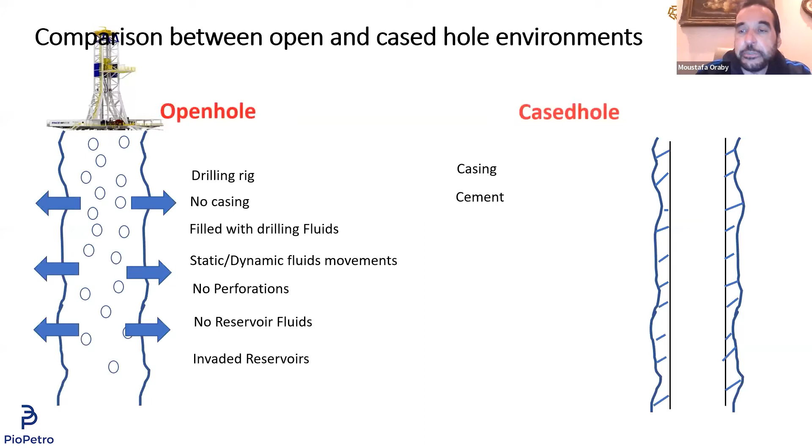That's the situation we are used to seeing in open hole, which is not the case in cased hole. If you compare this to the cased hole, you drilled the section, then you descended the casing. So this is the casing there, as you can see, it's right there. And the casing, you cemented it after you set it into the wellbore, so you have the cement between the casing and the reservoir or the formation.

Then you either keep a workover rig or you put the production equipment, so you have the wellhead in there. Then you start doing the perforation, so you have the perforation there. You perforated the reservoir, then you see the fluids actually coming into the wellbore from your reservoir. So the reservoir now started to produce.

When this happens, we have two situations. Either the fluids inside your wellbore are static, shut in—we call it shut in—meaning you're not really producing the formation or reservoir yet, so the fluids are static, there's no motion in there. Or the fluids are actually flowing, which we call dynamic. So in cased hole, we have two situations of our reservoir fluids.

Either the flows are static when we shut down the well, we're not really producing, or everybody knows from production logging that you control flowing or shut-in from the wellhead by controlling the pressure in front of the perforations. So you can control if the fluid is flowing or static. This is very important in cased hole, because we can log while the fluid is flowing, and we can log while the wellbore is shut in, meaning the fluid is static. The fluid we deal with in cased hole is not drilling fluid or mud, there is no mud, so what you're actually dealing with is the actual reservoir fluid.

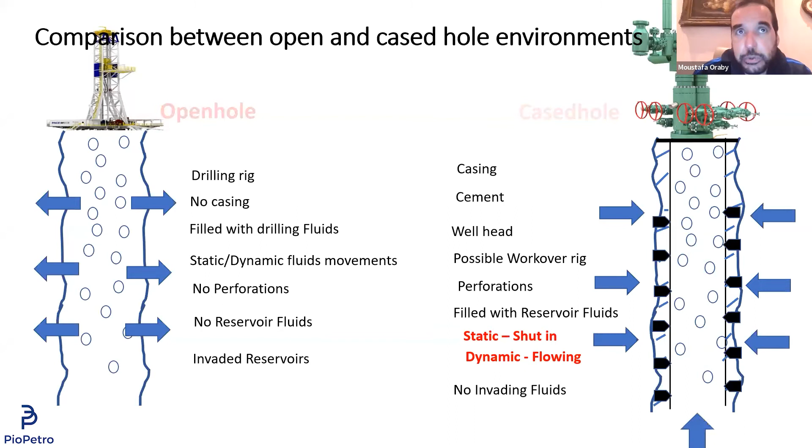So the cased hole function is much, much more than the open hole function. The open hole, we do it once. Cased hole, we do for the entire life of the well - we have to monitor this. That's why sometimes we call it reservoir monitoring. We have to monitor the reservoir - what's really happening inside our reservoir, what are the changes in the reservoir fluid, what is the change in the reservoir, in the wellbore itself. So there are so many aspects for cased hole logging.

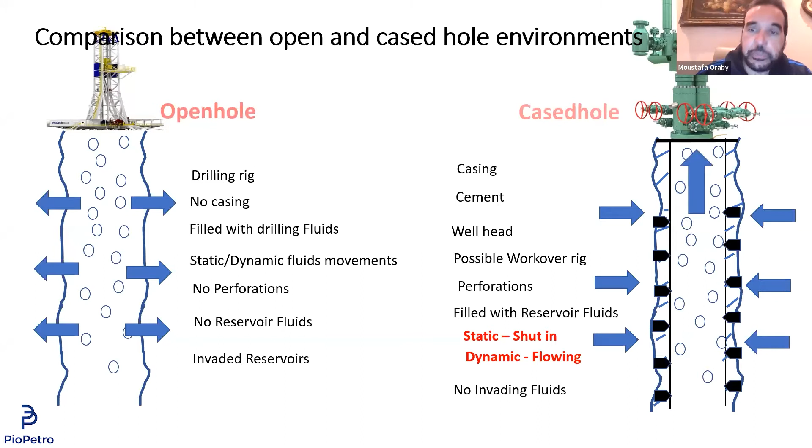Once we define this, then we have to look at what is cased hole. I can actually divide this into three components. So just keep in mind, in cased hole I divide everything I need to look for into three main components. The first component is inside the wellbore - what's happening inside my wellbore, what is the condition inside my wellbore. My wellbore now is defined by the casing.

What's inside my casing? What's really coming inside my wellbore, because I don't see the reservoir in the wellbore anymore - my reservoir is actually covered by the casing. So what's really happening inside my wellbore?

This is one aspect. The second one is what's happening between the wellbore and the formation. What's happening in the casing? What's happening in the cementing? Is the casing in good condition? Is the cementing in good condition? So that's something else. So now we talk about the wellbore itself - the fluids contribution, the fluids status, what's really happening there. Then what's happening in the barrier between my wellbore and my formation, which is the casing and the cementing.

Also, what's happening inside my reservoir? What's happening to the fluids? How much hydrocarbon do I have left? Where is the water coming from? If there is water, where is the oil coming from? If there is oil, where is the gas coming from? If there is gas. So actually you divide it into three major components.

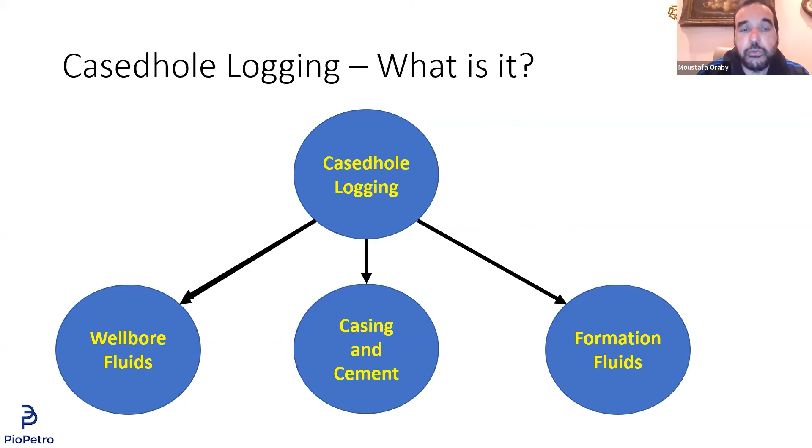Inside the wellbore component, between the wellbore and the formation, and then outside the wellbore, which is the reservoir itself. So inside the wellbore, we monitor the wellbore fluids. Between the wellbore and the formation, we monitor the casing and the cement. Outside the wellbore, we monitor the formation fluids. So we have three things to look for: wellbore fluids, casing and cementing, and the formation fluids. That's what we really have.

Again, when we look at this, we call few things fluids. What do you really need to know about fluids? I need to know the type of the fluids, the velocities, and the rate of the fluids, which are very important to us. What fluids are we producing? For example, if I'm in an oil reservoir, I do not really need to see many or multiple gases or a high gas rate in my wellbore. I don't want to see any water coming out. So I need to look at what's happening in there, and if I can control the flow from my reservoir into my wellbore - the velocity of the fluids coming in, and the flow rate of each one of these fluids - this is very critical in evaluating the performance of my well.

So the cased hole is really well performance. And if you look at the whole number of wells, it is field performance.

The second one is the condition of the cement and the casing. I need to know, is the casing in good shape? Anything happened to my casing? Cement - what's really happening in the cement? Because sometimes if you're not really understanding the cement, we'll talk about something like a channel. A channel is really very dangerous in the life of the reservoir. We don't like to see any cement channeling between the casing and the formation.

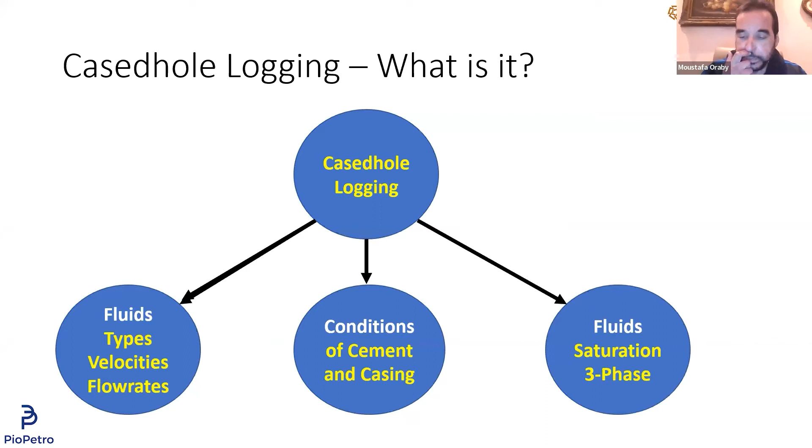So what do we call them in this case? The first one we call PLT, production logging. Whatever we actually look at inside my wellbore is part of my production. So one part of cased hole logging is production logging. Production logging looks at what's inside my wellbore - the velocity, the type of the fluids, the flow rate - all of these things we call production logging. So the first part of cased hole logging is production logging.

The second part of cased hole logging is the casing and cement inspection. You have to continuously inspect the casing condition. You have to continuously inspect the cement condition. That's the integrity of your reservoir. So the second part we call casing inspection and cement evaluation. This is also part of cased hole logging.

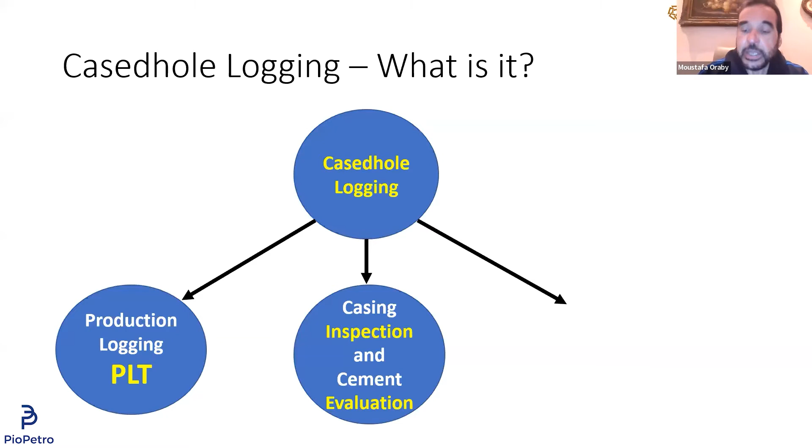The third one is saturation behind casing. What is the water saturation currently now? What is the oil saturation currently now? What is the gas saturation now? So we need to know all of this.

If you look at any cased hole logging, sometimes people - and I can see this even in the industry - mix things together. They think cased hole logging is only the monitoring of the reservoir. That's not true. Cased hole logging has three components: the first is production logging, the second is casing and cement evaluation, and the third is saturation behind casing.

So keep in mind that you have three different zones, and every zone requires a lot of attention, because this will control your productivity, your well performance, the integrity of your well and how it's behaving, or if there's anything dangerous you need to take care of - anything that may result in a blowout or whatever. You need to make sure you're really in good handle of the reservoir condition and the well condition that you have. So the three components are production logging, casing inspection and cement evaluation, and saturation behind pipes.

In every one of these webinars on cased hole logging, we will touch on some of these.

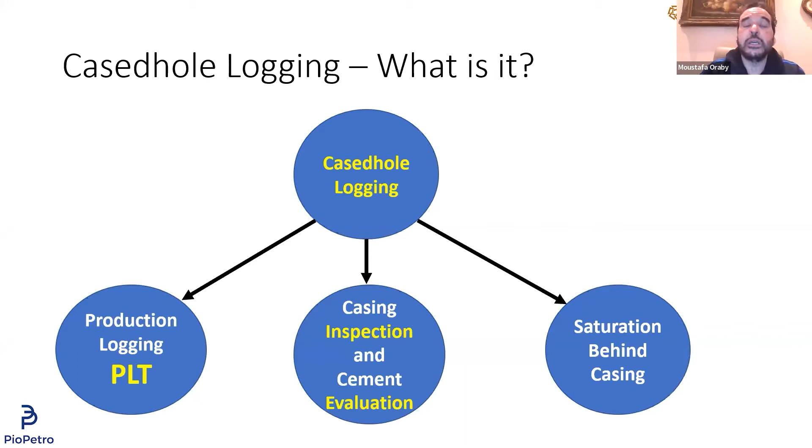Once you understand the idea and how we do the measurement, it becomes much easier to say, if I see this phenomenon, it means that. Because when you understand the tool and what it measures, it's easy to understand what the log is showing. And if something doesn't make sense, understanding the tool helps you determine whether it's real or what it means, because there are so many things you need to be careful about when doing cased hole logging.

So in this case, let's go to the first one. When I look inside my wellbore, I can see so many things happening—that's when I go for production logging. I can see water coming in, I can see oil coming in, gas coming in. If you look at this example, it's an oil reservoir.

Once you start producing your reservoir, what happens to the pressure? It will go down, it will decrease. The more I'm producing, the pressure decreases—so the driving forces decrease. Now, if you're not perforating in the upper zone, let's assume you have a gas cap on top that you're not producing. The zone you didn't perforate still has its own pressure since you're not producing it, so the gas will expand and go through the perforations you have, generating what we call gas coning.

Gas coning can occur if you have a certain type of gas cap. Also, gas can come from production itself because if your pressure goes below the bubble point, you start seeing gases. Similarly, if you have an aquifer—a water zone at the bottom—once you start producing, you have high pressure in that zone which will try to get into your perforations, and water will come in. So you may end up producing gases from the top due to the gas cap, and water from the bottom due to the aquifer, since both the gas cap and the aquifer at a certain time will have pressure higher than your reservoir pressure, and they will try to get through the perforations you have.

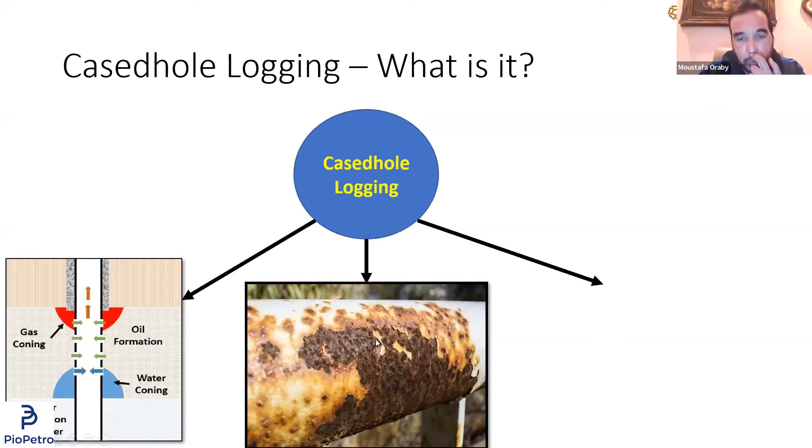It can be even worse. It can be corrosion in there. Look at this, what's happening to your casing. I need to find this out. That can put my well in a very bad condition and can result in so many bad things that, God forbid, can be really a disaster in the field. So we need to know that. How can I identify this? How can I measure that? What are the tools that we use to do this? So this is really something that we need to monitor.

Also, if you look here, for example, there is a pitting or a pit happened inside my casing. So what happened if I have a pit inside my casing and I don't have a good cement? In this case, the fluid from the well bore will get into the zone between my casing and the formation, and extra pressure will be building up. If I have a channel inside my cement, the fluid will get in and fill these channels. This is a big disaster that can result in really big disasters in this well, and probably something we don't want to happen. So monitoring this frequently, in a certain period of time, we have to do this to make sure we are really controlling our wells well, and hence our field as well.

At the same time, here again is our reservoir. Now we will talk about the reservoir fluid itself. How much gas do I have? How much water do I have? How much percent-wise, saturation-wise? How much saturation do I have from oil? So we need to find the saturation currently, and probably periodically, every 6 months or every year, depends on your company. Some companies actually have a periodic check every 6 months. We need to know what's really happening in our reservoirs.

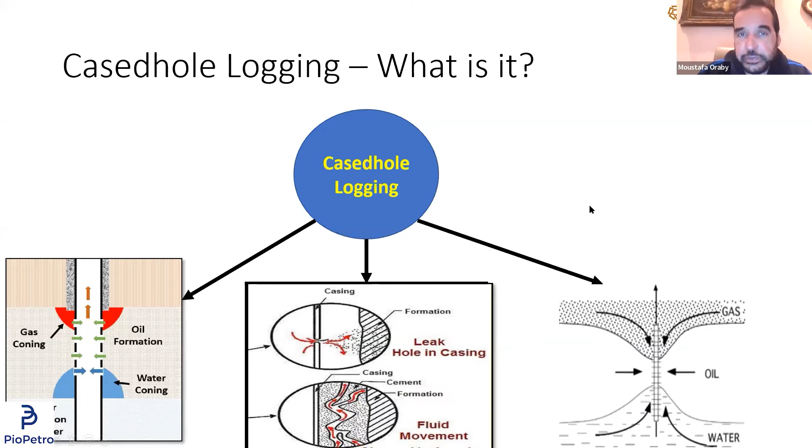So that's the cased hole, and that's what we are looking for, and what we really need to monitor every time and every now and then in the life of our field. So let's start with that. From that definition of what is the cased hole, let's just start to see how can we do this, and what are the tools that we use in this case.

So let's just start with the first one, inside the well bore. We'll start today inside the well bore and see how can we measure, how can we identify, how can we predict what's really happening inside my well bore, which we previously called PLT, or production logging tools. So production logging will be the first one to start with, to really monitor what's happening inside your well bore. So if anybody is talking about production logging, you know that they are monitoring what's inside the well bore.

So an important question to answer, we always say, is there any gases coming from the formation? That's a big question, a very important one. In many situations, we don't want to see these gases coming out. Sometimes the gas rate is very high and it causes issues, we just don't know what to do with these gases. Some of us go and flare these gases, and nobody likes to flare things. So it's very important to know, is there any gases coming out of the formation?

Also, is there any water coming from the formation? These are two very important questions. And it's not just if there is any water or gas coming in, but from where it's coming in. What are the perforations that's actually giving us these gases, or providing us with this water? Probably if I know the location, if there is a way to fix this, I need to go and fix it. So before you go and fix it, I need to know where it's coming from. First of all, is there any of them? Second, where it's coming from.

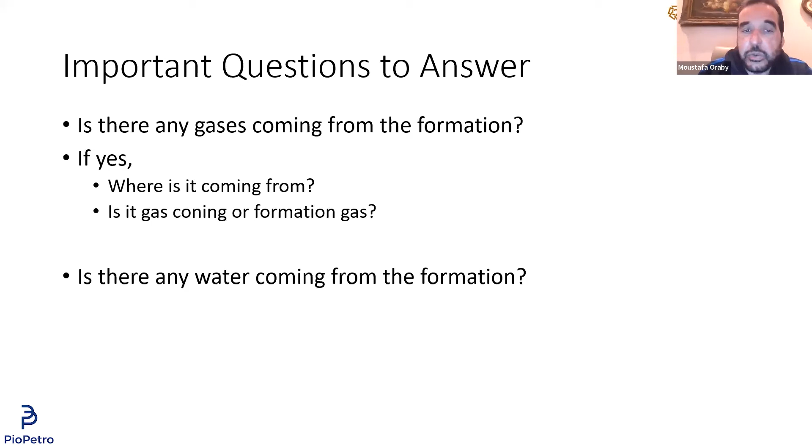So the answer to the question, if yes, then where is it coming from? And is it gas coning, or is it gas from the reservoir? I need to understand that very well. Similarly, if I have water and the answer is yes, then where is it coming from? Is it coming from an aquifer, or from low pressure, or something I need to deal with as far as the reservoir is concerned? So answering the two questions: yes, I can see gases coming from my production, I can see gases, I can see water is coming with my fluids.

Okay, but that's not the answer. Yes, I can see that from the wellhead, I can see from the fluid that's coming at me. But the most important question is: from where? Where is it coming from? Which perforation is providing these types of fluids?

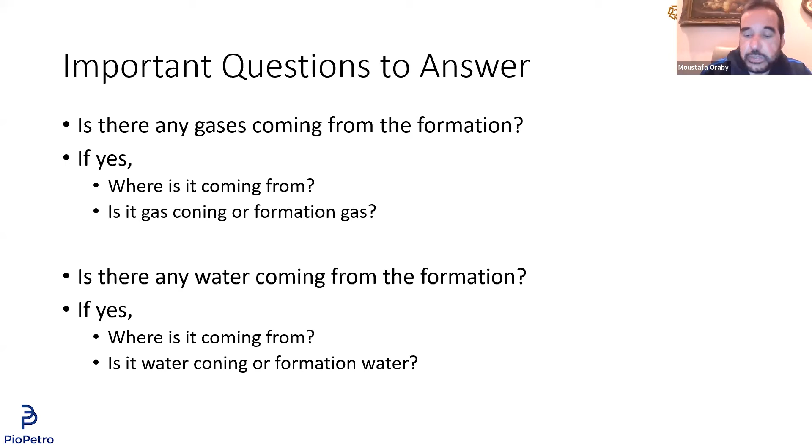We'll look at some examples here to show you that some of the perforations will produce water, some of the perforations will produce gas, other perforations will produce oil. So we'll see some of these examples to show you how we can find this out.

Okay, again, that's the same. I always use this actually to explain the gas cap and the water coning. And these are very bad things. When you see coning, that's not really something that we like to see, and we need to control this very well.

Okay, so let's start with the gas first. Where the gas is coming from and what are the reasons for the gas coming from. So what happens when the gas flows in the wellbore? We need to answer that question very clearly from the physical understanding of the gas itself. And also, once the gas comes in, how can I detect it? How can I know the gas is flowing? Because I need to know where it's coming from and also how to handle this.

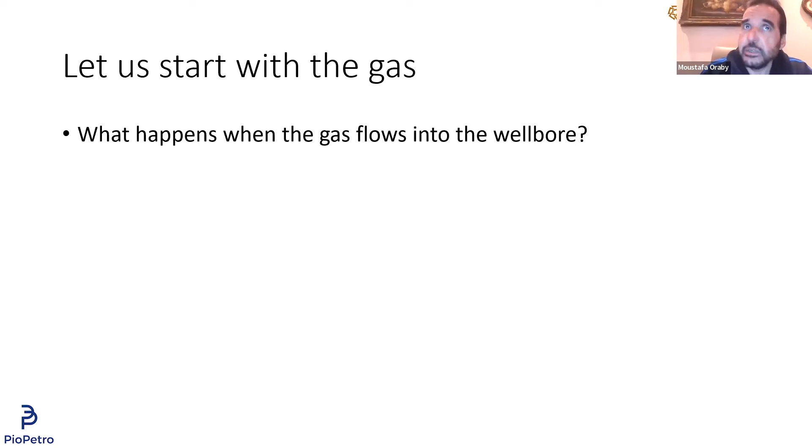So what happens when the gas flows into the wellbore? Very interesting question. Here is my well, and let's assume here are my perforations, and let's assume I have a gas cap there. And I started producing my reservoir. So this is the gas cap on the top, above my perforation. I actually did not perforate in the gas cap; I perforated in my oil zone.

Gas cap is above, here is my oil zone. I perforated inside my oil zone. So this is my reservoir, which I'm producing from. But above me, there is a gas cap.

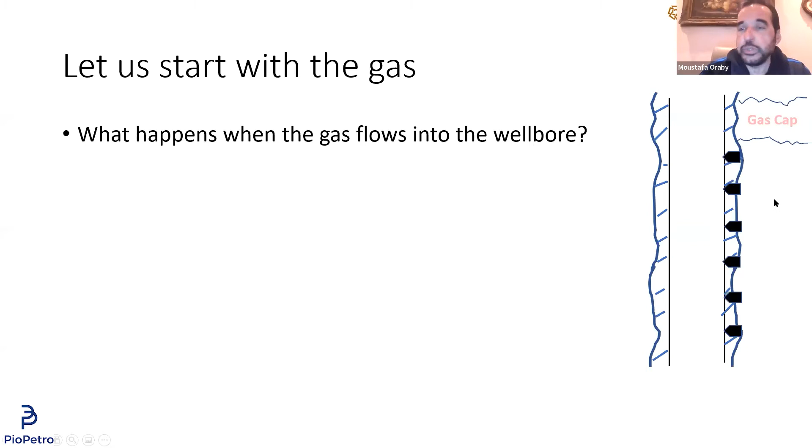Through the time when you start producing, the pressure will decrease. Your reservoir pressure will decrease, but you are not producing the gas cap. So in this case, the gas will expand and go inside your formation, and it will actually see these types of perforations. So the gas will come through these perforations, and that's what we call gas coning.

So gas is coming from here. Here is low pressure, here is high pressure. The gas will for sure expand, and we'll see that gas coming through this type of perforation, and boom, it actually gets into your wellbore. So the gas is coming inside my wellbore.

What will happen in this case? How can I detect this flow of gases? And how can I know it's coming from this zone, not from any other zone? It's very, very important to know that. So what we do actually in this case is identify the zones that are producing gases and where it's coming from.

So when the gas actually comes out, it expands. We know that gas expands. If you do this at home, just get your perfume or something and press it. When you press the perfume head, what will happen? You actually lower the pressure and then the gas will expand. The perfume, which is a type of gas, will expand. So the gas expands.

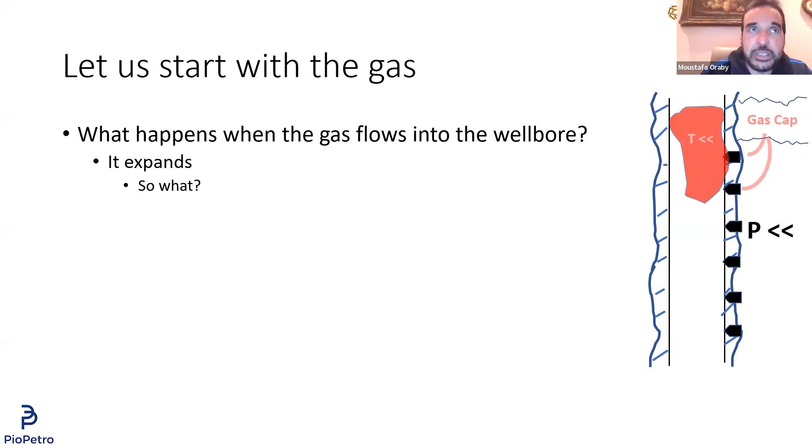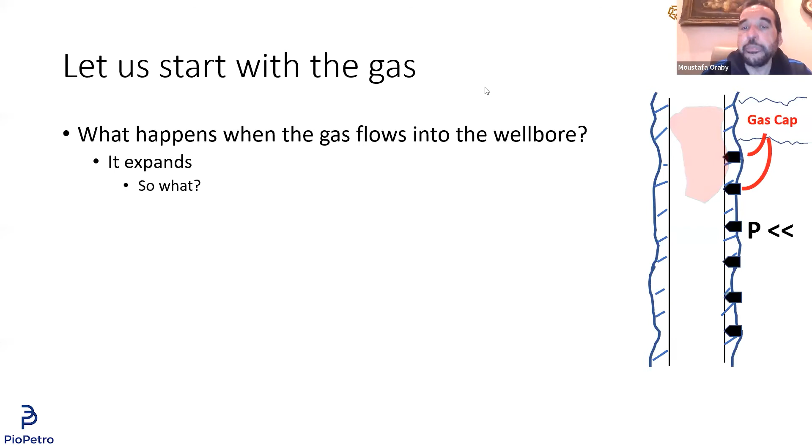What will happen in this case? If your perforation, or a certain number of perforations, are producing gases, the temperature will be cooler. The temperature will drop. That's how we find out where the gas is coming from. The temperature goes down because gases actually expand, and when they expand, they lose temperature. Now it follows this rule.

To understand this, we need to follow the Joule-Thomson rule, which we study in reservoir engineering. It says any gases, when they expand, cool down. Okay, that's good, but we need to know why this is happening. We are engineers, we don't take things as is. Why is this happening? That's very critical.

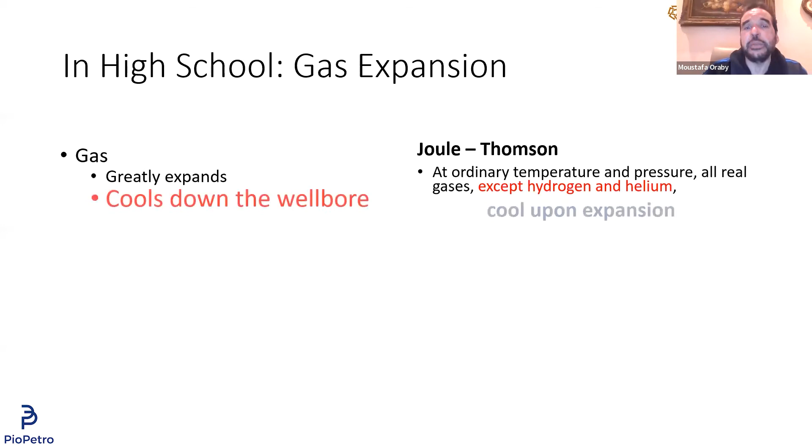Actually, what happens is the cooling occurs because when the gases move, this means the gases are coming from the perforation. It comes out, so the molecules of the gas are separating, meaning they take more space and move faster. So the molecules of the gas move faster. What does it mean when they move faster? Velocity increases. What does it mean when velocity increases? Energy increases, since energy is half mv squared classically, and if velocity increases, energy increases.

Where did the molecule get the energy from? From the surrounding. So the molecules take the energy from the surrounding, and the surrounding has to cool down because it gave its energy to the molecule. So that's the whole idea.

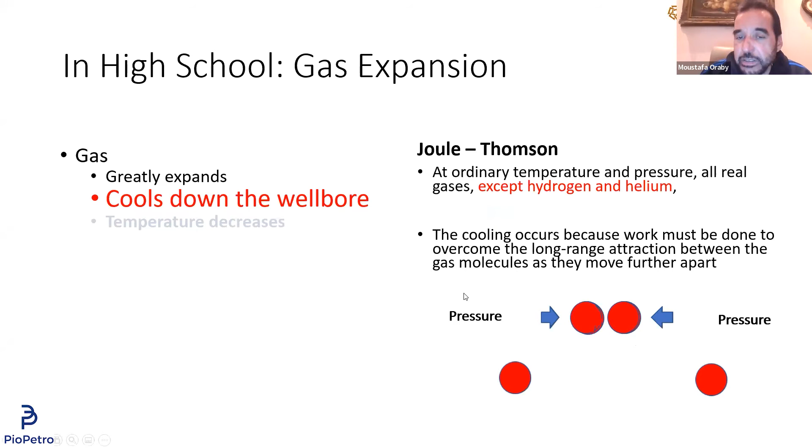Gases inside the formation are under pressure. When they leave the formation and go into the wellbore, the pressure decreases. When the pressure decreases, the gas expands. When the gas expands, it gains velocity. When it gains velocity, it's taking this energy out of the surrounding, so the surrounding cools down.

So we now understand the phenomena of why the temperature decreases. Because of the expansion of the gas, the high velocity of the gas molecules takes energy from the surrounding, so the surrounding has to cool down. The reason the temperature decreases is because of the expansion of the gas.

When we talk about hydrogen and helium, I don't want to go through this, because they are two exceptional gases that don't really follow the same rule. But all other gases, except hydrogen and helium—and thank God we don't have those inside our wellbore—all the gases we deal with will cool down if they come out of the perforation.

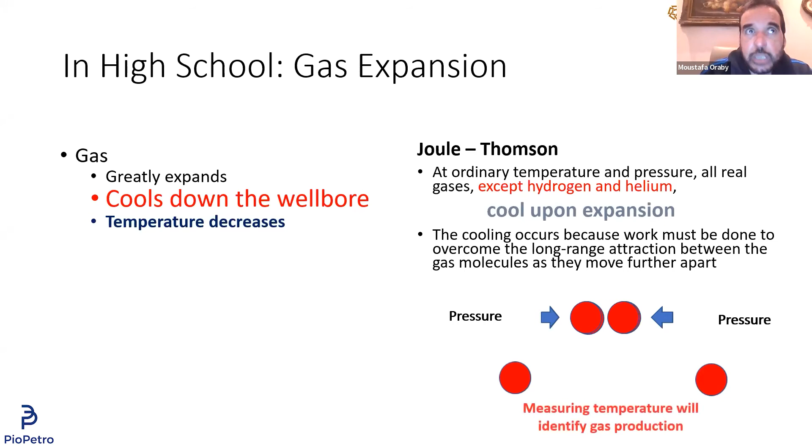Okay, so we understood the idea, we understood the signature of whether there are any gases coming in or not. So in this case, what we need to do is design a temperature log. The whole thing is how to measure the temperature now. So we understood that the temperature cools down, and to find out where the gas is coming from, go and measure the temperature across your wellbore. When you see a drop in temperature, that's where the gas is coming from.

Okay, well, how do we measure temperature? As I told you, most of these tools are very, very simple. Understand the idea, and it becomes very easy to interpret all these tools. This is going to take you back to elementary school, and I'll show you exactly that. In elementary school, we learned what happens to resistance when you heat it up.

When you get a certain metal that has a resistance, and you start heating this metal, what will happen to the resistance? Well, the resistance will increase. Why is that? I used to see these things, I got this from the internet, a very interesting cartoon that shows what's really happening.

If you raise the temperature, they show the electrons as these funny little things. When they come through the rod or the iron, they see an area that's very hot, so they cannot really move. The electrons slow down, meaning there is no current coming in, and that means the resistance is high. So the higher the temperature, the higher the resistance.

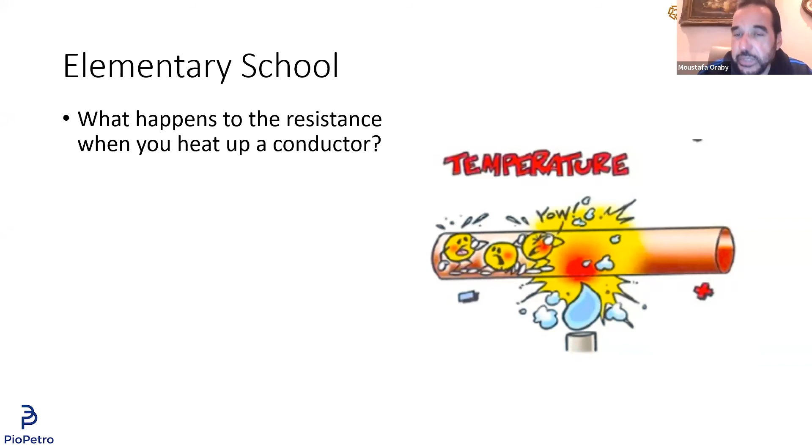So the whole thing is: the resistance increases when the temperature increases. Let's get some equations for it. Rho, or the resistivity, equals rho initial times 1 plus alpha T. T is the temperature, and alpha is what we call the resistance coefficient or resistivity coefficient. Every metal, every material with resistance, has a certain coefficient as a function of temperature. For example, iron is different than steel, different than nickel, different from all these elements.

We don't want to go through all the details of what temperatures or resistivities they use, that's not really important. What's important to us is that we will see a change in temperature, and that change will indicate the existence of gas or not. So this is the phenomenon we use for measuring temperature. Let's see what's going on.

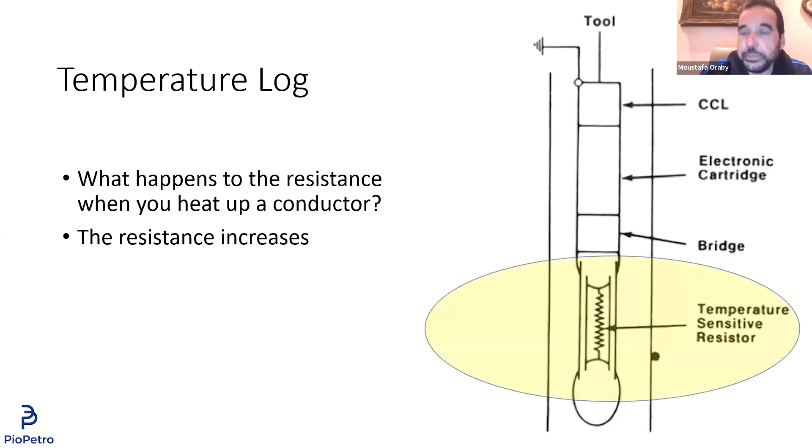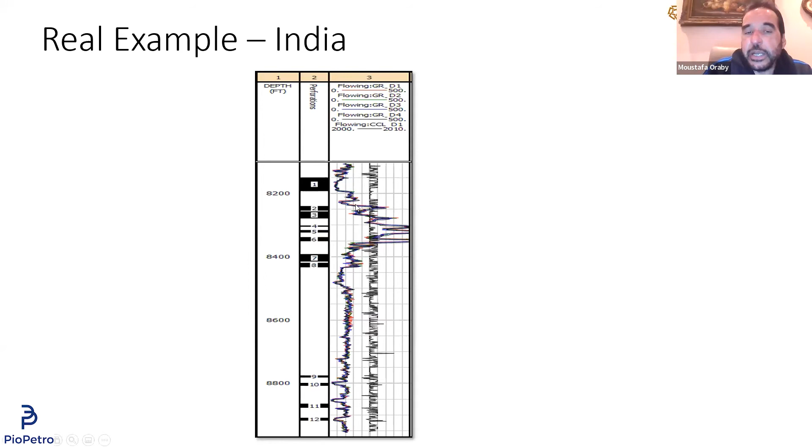So according to the open hole logs, they decided to go and perforate all these zones. Okay, here is my gamma ray, as you can see right there. Now we ran the temperature log. Here is the temperature log.

Before we go into how to evaluate the temperature log, let's see something very important. You have multiple passes - that's something we do in every cased hole logging. Remember, in open hole logs, we don't really do logging going down. That's not a normal procedure of logging. We always do logging pulling up, because we need to make sure about the stretch of the cable and stuff.

In cased hole, since the environment is a little bit more controlled, we can actually do corrections for the cable speed and stuff. So we can do logging down and logging up. We don't do this only once, we do it multiple times. So we have to do multiple passes.

Multiple passes - for example, in this well, we did 4 logging down. If you look at this, D1 means down pass 1, D2 down pass 2, D3 down pass 3, and so on. We have 4 of them logging down to acquire the data 4 times. You look at all the data - you don't have to average, but you need to look at the consistency and the repeatability, how these data are repeated.

So we do logging down, and also we do 4 logging up. You go down and you go up, again you go down and you go up, 4 times. And you look at all these measurements. That's why you see multiple stacked curves - these stacked curves are 8 of them, 4 of the measurements going down and 4 going up.

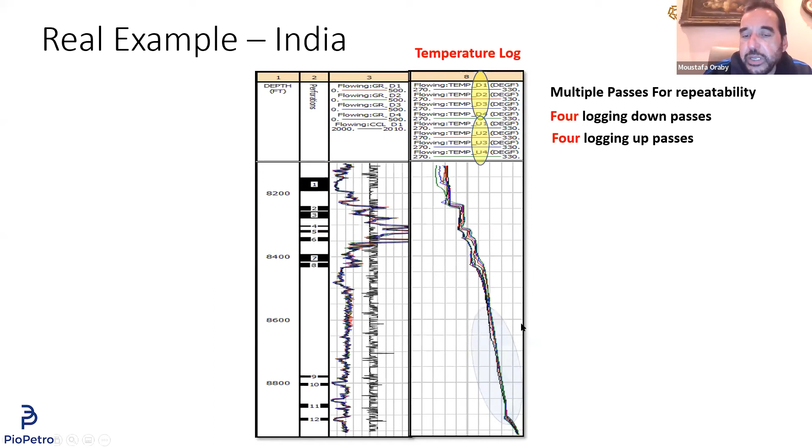Now, to understand what's happening here in this temperature log, I can go from bottom up. For example, I can see a very nice decrease of temperature, but not in any sudden way - this is actually a very nice behavior of temperature logs. The temperature decreases in a linear way here, so there's nothing abnormal happening, no sudden change of temperature. This is the gradient we expect inside a certain well bore.

So this is a normal gradient of change of temperature, because temperature increases going down and decreases going up. The temperature is decreasing in a very nice way, but we did not see this happening up here - it's not going in the same linear decrease, it goes in that direction all the way up. We can see a big difference between what's happening down here and what's happening up there. I can see a drop of temperature clearly, especially in this zone right here - a very interesting drop.

Now, if I look at the scale here, it's from 270 degrees Fahrenheit to 330 degrees Fahrenheit. Between these two is about 60 degrees. If I divide 60 degrees over this 10, then each one of these divisions is 6 degrees. If I look at the drop here, it's about 2 of them, or maybe 1.5 - that's about 12 degrees. So the drop in temperature here is 12 degrees at this specific point.

If you see that very high drop in temperature, no question - gas is coming from this zone. I can see the drop of temperature, very high drop, 12 degrees at this point. So in this case, these perforations are producing gas, no question asked. So depending on whether it's a gas well or just a gas cap, we actually need to do something about it - that temperature drop here.

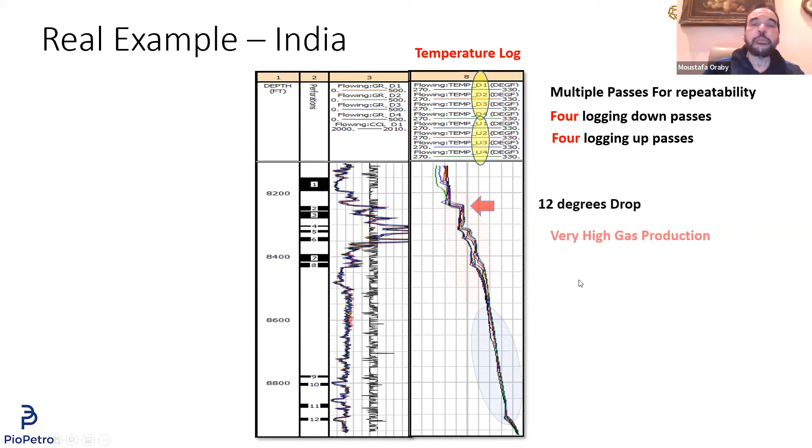There are some other tricks we do when we look at cased hole logging, but I just want to touch base with you on these ideas and how we can predict something like what we see here. Then we come to the second one: water. Water is coming in, where is the water coming from? We understood the gas detection idea. You'll be surprised that detecting water is even simpler than detecting gas. We detected gas by simple temperature measurement, and we understood that when gas comes in, temperature cools down.

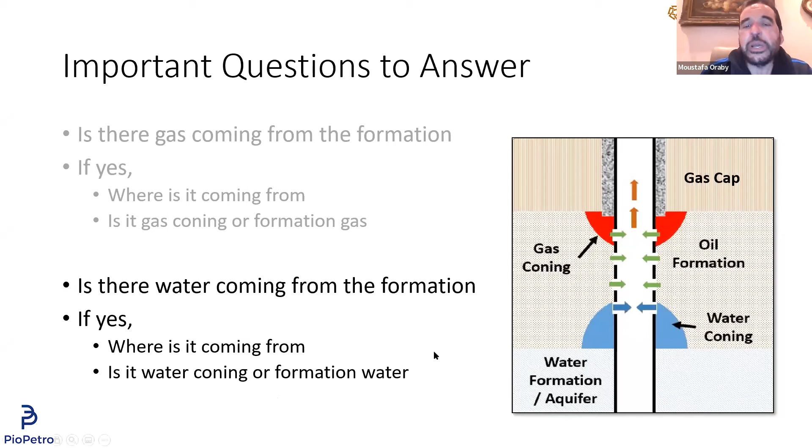You just measure temperature, and the tool is composed of a resistor that goes up and down with the change of temperature. So about the water, water is coming in, how can I identify water? Let's go back to middle school. Remember, temperature was primary school. Let's go to middle school now.

What's really happening, we studied something called a capacitor. Let me remind you what a capacitor is. They told us in middle school that if you have two plates, each plate has an area A, and the distance between the two plates is D. Now if you leave air between the two plates, nothing inside but air, and then you put a battery between the two plates, what happens? The positive charge from the positive side of the battery will go and stay on the surface of that plate, and the negative charge will go and stay on the surface of the other plate. So you end up creating positive charges on one plate and negative charges on the other, and it's actually stored there. So the capacitor is the one that stores these charges. That's something we studied in middle school.

Then when we progressed and started looking at circuits and how we measure the capacitor, we identify something called capacitance. You can identify capacitance by two different methods: either by the charges accumulated over the surface, or by the design and geometry of the capacitor. In this case, the deposited charge gives us the capacitance as the deposited charge per unit voltage. So I have a charge created by a certain voltage, and the charge over the plate of the capacitor per unit volt is the capacitance. So capacitance equals Q over V, charge over voltage.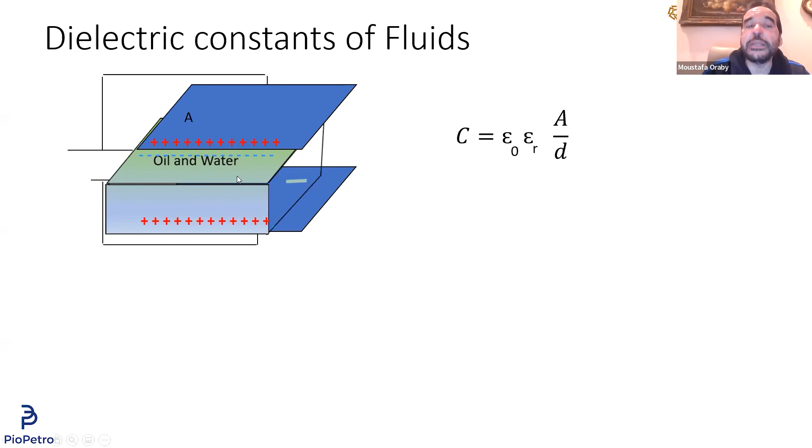It will be epsilon naught times epsilon R. Epsilon R is the dielectric constant of the material that lives inside the capacitor now. So you've added the material to the capacitor - multiply epsilon naught by epsilon R, where epsilon R is the dielectric constant of the material that now exists between the two plates. Epsilon naught is for the air and epsilon R is for the material.

Now if you look at oil or water, what is epsilon R for oil? 2.2. What's epsilon R for water? It's 80 - a big difference between epsilon R of oil and epsilon R of water. So I can easily use it to identify water, because my capacitor will read very high. The high capacitance will happen if water gets through the capacitor.

Look at how people think - it's a very interesting, very simple idea, but that's how we identify it. This is what they call the capacitor log. You may have heard about the capacitor log if you're working in the industry - hear about capacitor logs in production logging, but you may not know what the capacitor log actually is, or why the capacitor will actually find out where the water is.

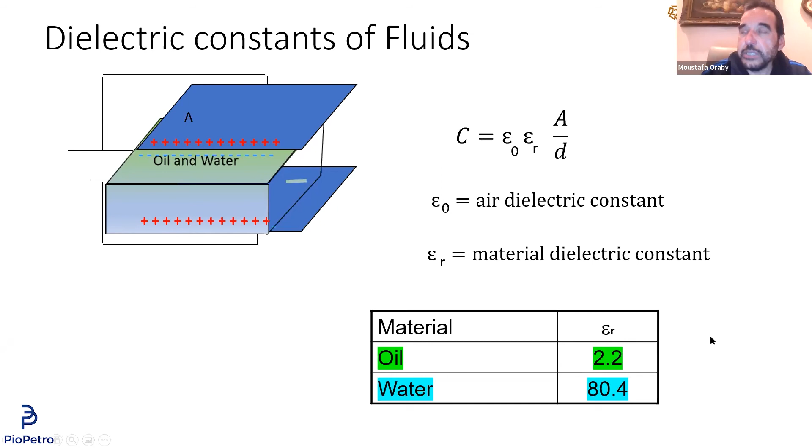The reason is the dielectric constant - when water comes in, the dielectric constant of water is much higher than any other fluid. The dielectric constant of gases is very, very low. So water is actually 80 and oil is about 2.2. That's the whole thing.

If this is my casing - now I'm not really drilling a formation, this is my casing, straight line, this is my casing here - now if I put a capacitor, two plates, well the plate here, if I take it that shape, that geometry, is not going to fit my wellbore, my wellbore is cylindrical. Well, it doesn't matter - then you do two cylinders. Instead of having two plates, make it two cylinders, an inside cylinder and an outside cylinder.

Allow the fluid to go between the two cylinders. So there's an inside cylinder and an outside cylinder, and this area is empty here. Now if the fluid comes in and fills the area in between, we measure the capacitor. If the capacitance reads very high, that's an indication of water, and if it's very low, that's an indication of non-water. I don't really care if it's oil or gas - now I need to identify the water.

We use the temperature log to identify gases, so I don't have a problem with that. I don't really care about this, I need to identify where the water is coming from. So when I see the capacitance increase, I understand that the water is coming from this specific zone when the capacitor goes through it and the capacitance increases.

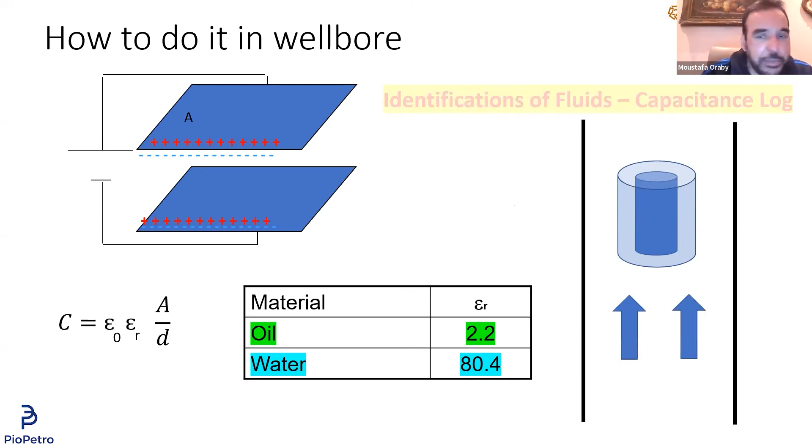Identification of fluids using capacitance is very, very easy for water identification. That's really true. Here is a schematic of what the capacitor is all about - here is the inner one, and here is the outer one, and the flow actually comes between the in and the out, similar to the cartoon that we drew. Actually, people do even much more than this now, with the same idea of the capacitor.

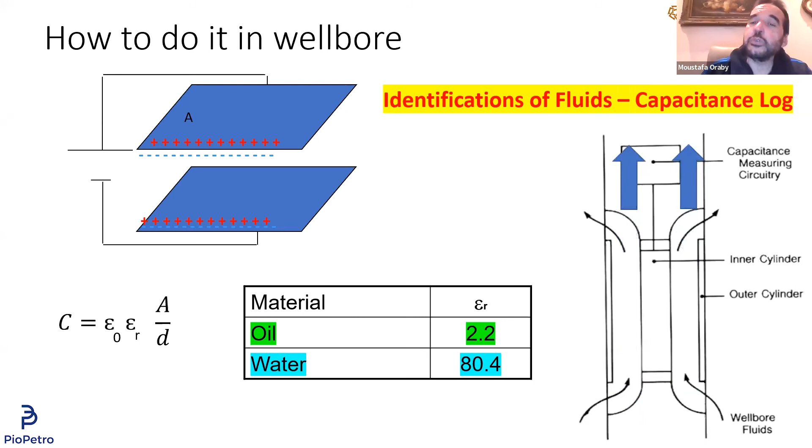I'm going to change the idea - can I actually do this by looking at the circumference of the well bore? Instead of having one measurement in the middle, can I go for the circumference? I can see exactly around me. So yes, you can.

So what do they do? They create multiple capacitors. They call it a multi-capacitor or multi-finger tool. These capacitors are across the well bore diameter, across the casing, or inside the casing, making measurements across the well bore diameter.

Now you allow the fluids in - you can see that all of them are arranged across a circular shape. Now you allow the fluid to come in, so you can see if there are even bubbles of hydrocarbon coming with the water, across that array of capacitors.

So instead of using one single capacitor - the idea is very simple. What's the point? Designing a capacitor doesn't take that much. So the idea is simple: you allow the water to come in and you measure this through capacitors.

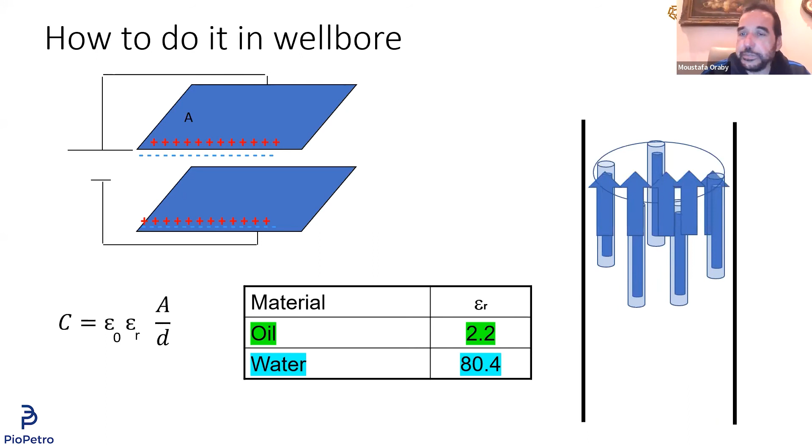Do I really have a tool like this? It's exactly there - here's the tool. The tool has multi-fingers, and all of the ends of these fingers are capacitors.

This capacitor tool opens inside the well bore and shrinks, so we can actually see the capacitors and the water distribution, even across the cross-sectional area.

Sometimes we talk about something called hold-up. I don't want to go through hold-up now, but to see what's really happening across the cross-sectional part of your well bore, the capacitor is the easy way to go, and you can measure the distribution of fluid across the capacitors.

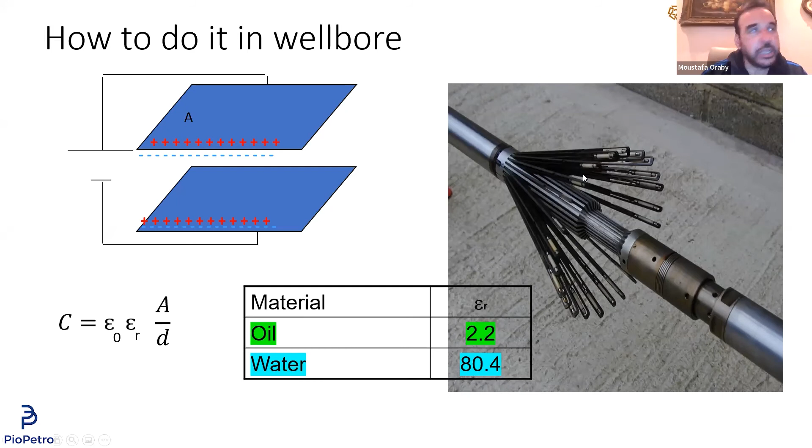So that's the real thing that we use - for example, this is an array capacitor. Let's go back to the same example we did - did we run the capacitor there?

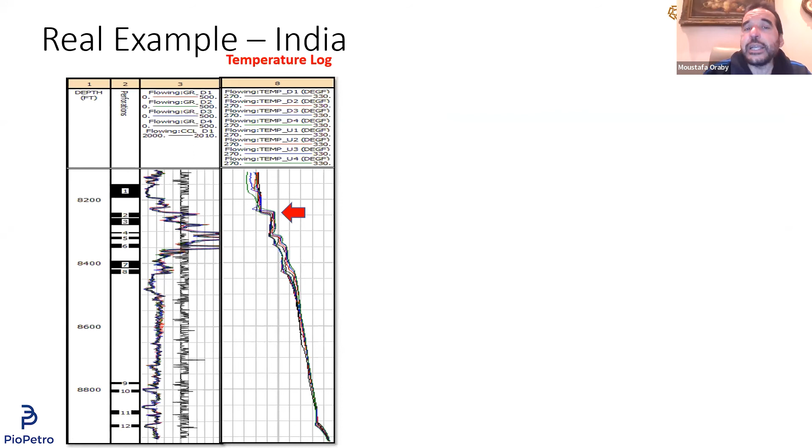I don't care what type of hydrocarbon - I'm after indicating where the water is coming from. So my capacitor will show where the water is coming from.

If I need to see gas, I already did this by the temperature log. That's why I combine the temperature log and the capacitor log - the temperature log identifies the perforation producing gas, and the capacitor log identifies the one producing water.

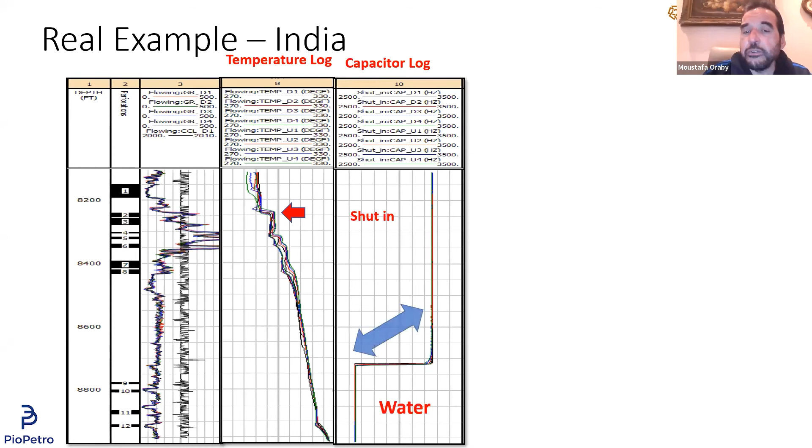So identified what's producing gas and what's producing water, and you can see clearly here a very sharp transition - that's in the shut-in. What will happen if I flow the well? If I let the well actually flow, here is the well flowing.

Now I can see a change in the level of the water. So I did it in shut-in and I did it in flowing. People will say, why are you doing this in shut-in and in flow?

Well, I really understood something important here. Looking at it from the shut-in point of view, I can see this is the line - things are static. Water is heavy, it will go down to the bottom of the hole. Hydrocarbon is light, it will go on top of it. I will see a transition.

That's because water is heavy compared to the hydrocarbon, so the water will be at the bottom, and at the top I can see the hydrocarbon. Again, I don't care what type of hydrocarbon it is, because I'm after identifying where the water zones are coming from.

Now, if I let the well flow instead of being shut in, I can see a rise in the water level. I know that today the perforations at the bottom are still producing water. Why? Because the water level in the wellbore is rising. If there is no more water production, I will not see any change in that level. There is no more water source.

Now I saw the transition here. I can see the transition. The water is coming up, increasing. So this is a confirmation that all these perforations down here are producing water.

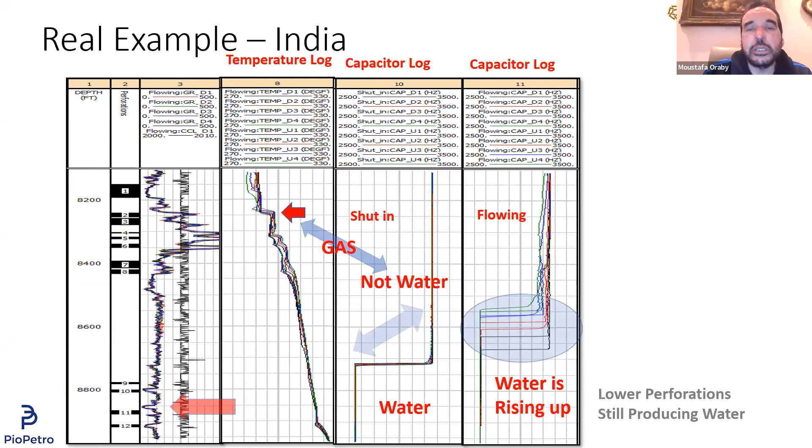So now we are in the wellbore. We identified where the gas is coming from, we identified where the water is coming from. Now, at what rate are they coming? What is the rate of these flows? This is what we call the flow rate, and it is very important.

Yes, we understood the flows inside our wellbore and where they are coming from, which is a very important piece of information that we came up with. Now, at what flow rate are these perforations producing? We do this with tools called flow meters.

Don't be surprised, but these are very, very simple ideas. Yes, they are very simple, as simple as the temperature log, as simple as the capacitance log. The flow meter is even simpler. I will take you through the flow. What is the flow rate, first of all?

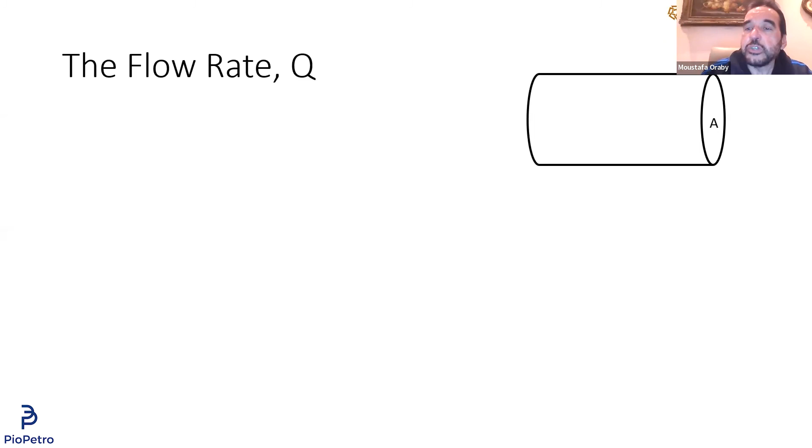Flow rate, if you look at it, is actually this: if you have a cylinder with a cross-sectional area A. What do we mean by cylinder? Because your wellbore is now a cylinder, since it is the casing, and casing has a cylindrical shape. It's an intact cylinder, not really an open hole which has a different caliper measurement and different diameters at every depth. No, it's a cylinder with a cross-sectional area A.

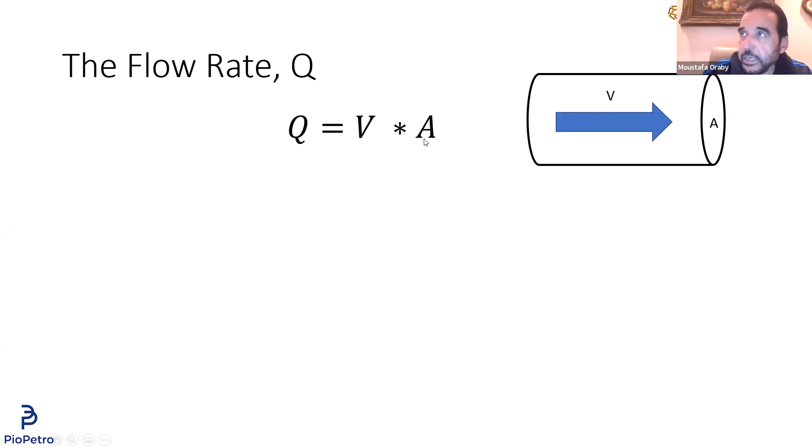Now there's a fluid coming in with a velocity V. We identify Q as V times A, where V is the velocity and A is the cross-sectional area. So Q is V times A, where Q is the flow rate, V is the velocity, and A is the cross-sectional area.

Now, area is very well known: it's pi over 4 times d squared, where d is the diameter of the casing. Some people say the casing can sometimes have scaling and such. Well, if you really want to do a caliper to measure everything inside your wellbore and you're that sensitive, that's okay, but I'm not the kind of guy who goes into such detailed things, because it's all measurement anyway. You can actually get the cross-sectional area at every depth using a certain type of caliper that measures the diameter.

In our industry, the flow rate isn't expressed in centimeters cubed per second or whatever; we go for barrels. So there is a conversion factor: Q equals a conversion factor C times V times A. That conversion factor takes us from SI units into our industry units, which are in barrels. So C is just a conversion factor to convert this equation into barrels per day.

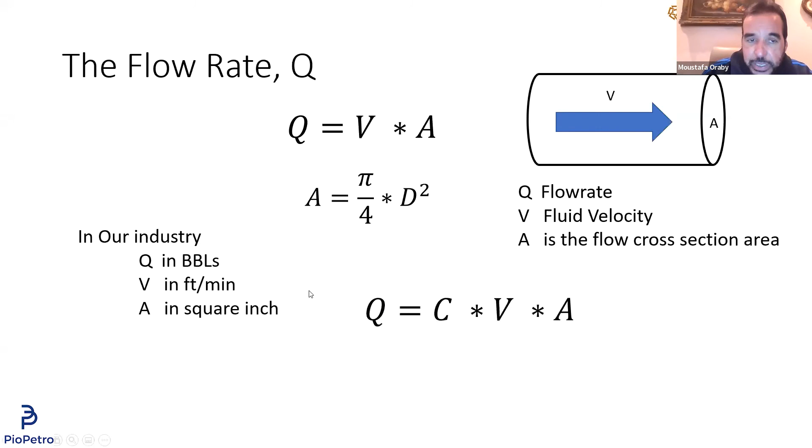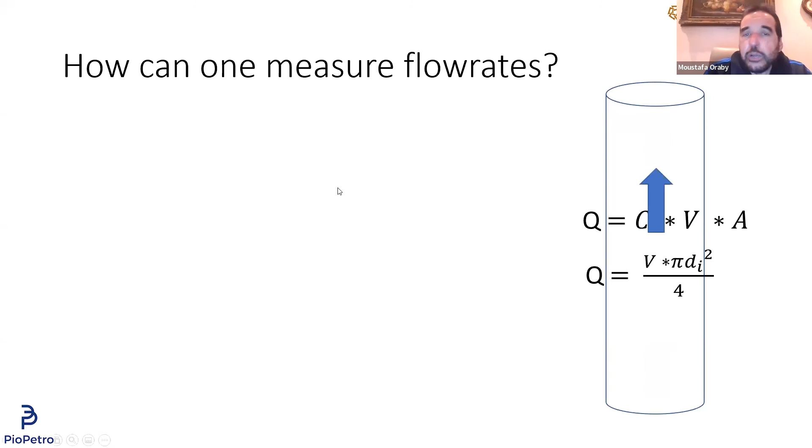So here is our casing, and here is where the fluid comes in. How can one measure flow or flow rates? It's actually simply by measuring the velocity, because the flow rate Q equals V times A. Cross-sectional area is known, so all I need to do is measure the velocity of the fluid.

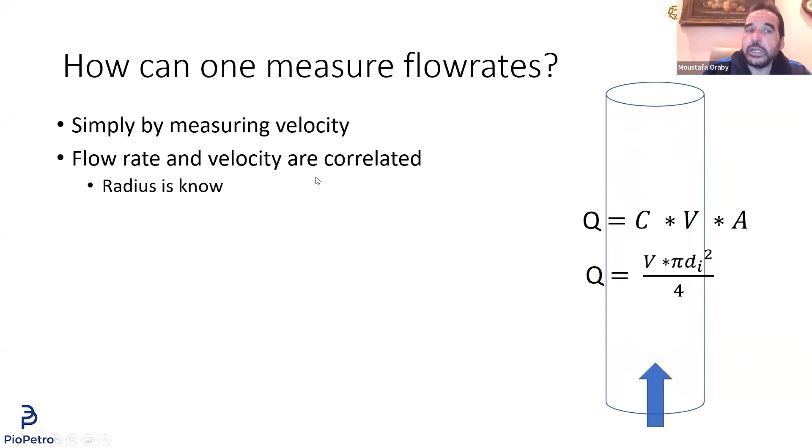Flow rate and velocity are correlated. Radius is known, or if you want to be more accurate, go and run a caliper. So the question now is, I know the cross-sectional area, now tell me how you can measure the fluid velocity.

Again, you will be surprised, it's from elementary school. Do we measure flow rate in elementary school? Yes, with a very simple idea that we learned in elementary school. Let me take you back to elementary school.

In elementary school, they told us if you have a magnet, here is a magnet, it has north and south. There are magnetic field lines going from north to south. We learned this in elementary school. Now also in the lab in elementary school, I'm not sure if they do that these days.

In the lab, if you get a wire here, or a piece of metal, a rod, and you start moving the rod up and down, and connected the two ends of the rod to a voltmeter, what will happen if you move this piece of rod inside the magnetic field, intersecting these lines? We knew that when you intersect the lines of a magnetic field, an electric current would come in. The cutting of the magnetic field by anything will produce a certain type of voltage if you measure it with a voltmeter.

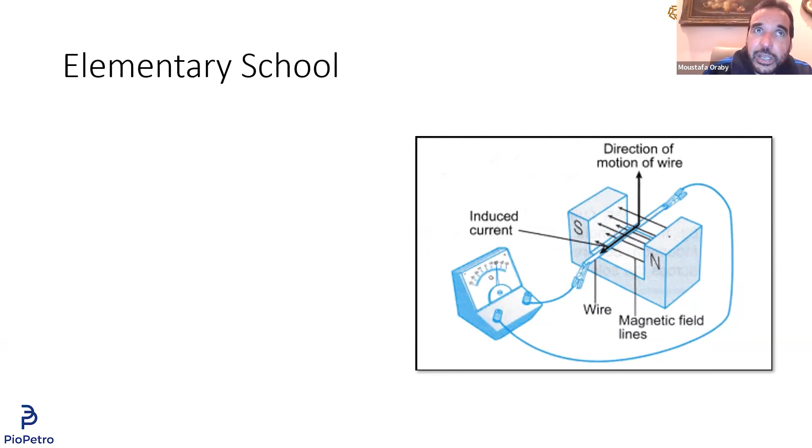Now, what if I increase the speed of the movement? The current will increase. What if I decrease the speed of the movement? The current will decrease. So to measure the speed, try to make something that actually cuts a magnetic field line. Try to come up with something that moves inside a magnetic field, and let that something cut the magnetic field lines. It depends on the speed of what you're doing, which relates to the velocity you have.

So in this case, the phenomenon is disturbing magnetic field lines with a wire. What will happen is an electric current will flow. We call this induced current. You see right there, we call it induced, meaning something induced by this movement. So this is an induced current, an electric current that flows as an induced current.

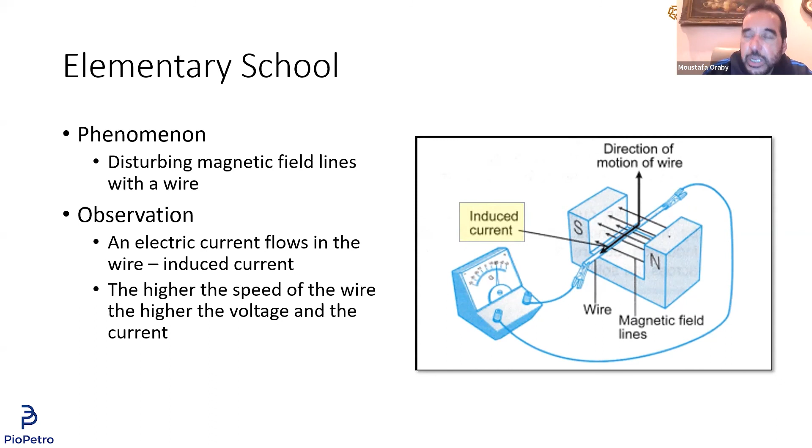Measuring this current, high or low, will tell you if you are actually moving with high speed or low speed. The higher the speed of the wire, the higher the voltage, and vice versa, the lower the speed of the wire, the lower the voltage. So the speed is the velocity, and this is the idea that we will use to actually measure the flow rate.

I'll show you now how this tool actually works. The idea of the tool is to get the flow rate inside your well bore by moving something. That something needs to cut a magnetic field line, which will induce a certain current. The higher the current induced, the higher the velocity that was cutting the magnetic field. So let's design a simple flow meter.

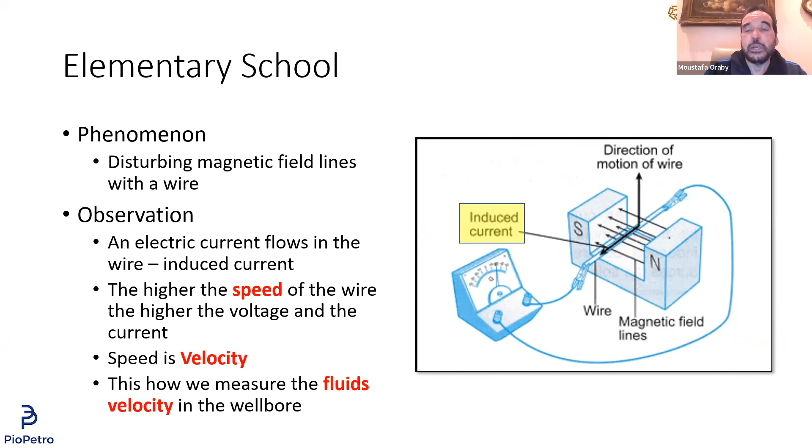Here is the simple flow meter. What we will do here is the flow will have a spinner.

Look at this, we call this a spinner. Let's talk about the spinner and its shape. The spinner is just something that can easily rotate - it spins, even the name tells you that. So when the fluid comes in and hits the spinner, the spinner rotates.

When the spinner rotates, look at this - here is a magnet up here. So when the spinner rotates, it cuts the magnetic field. This is exactly what we learned in elementary school.

Once the fluid comes in, it rotates the spinner. The spinner goes inside the magnetic field, and the higher the velocity, the higher the rotation, the higher the induced current. The lower the rotation, the lower the induced current. I can take this and calibrate it to velocity, as simple as that.

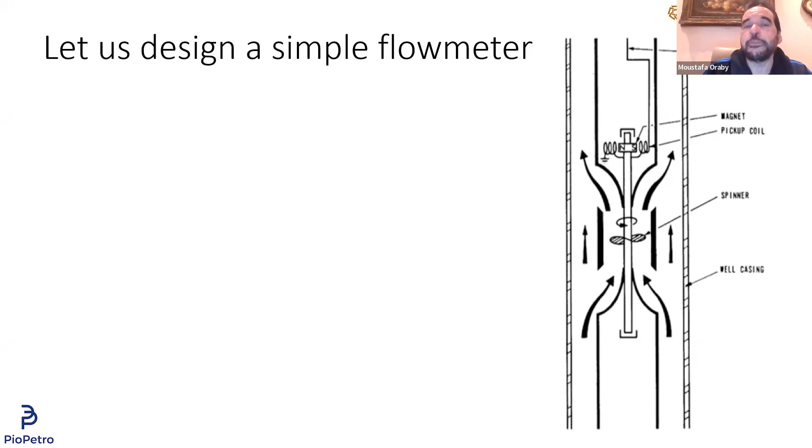Here, take this as a cross section - the fluid comes in here, and here are the blades of the spinner. Here's the spinner, and here are the blades. The fluid comes and hits the blades, and this one rotates.

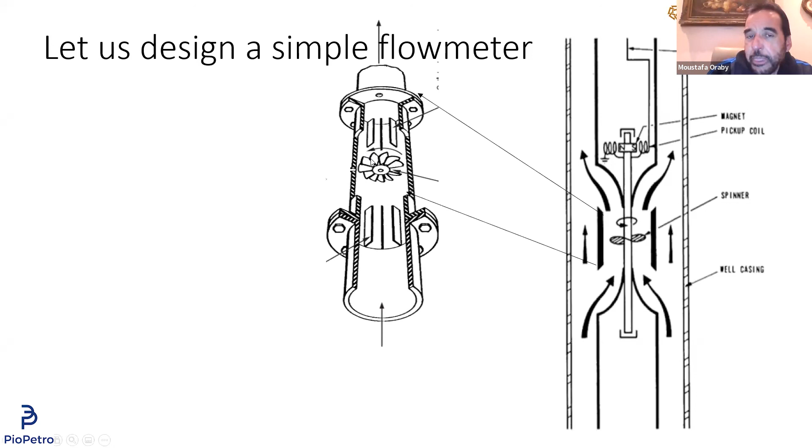Let me show you a bit more on the blades. Here's how the blades look - you see the curvature here. The fluid comes in, and this one rotates. It hits the lower part and makes this rotate. So what you do here is just a technology and manufacturing thing.

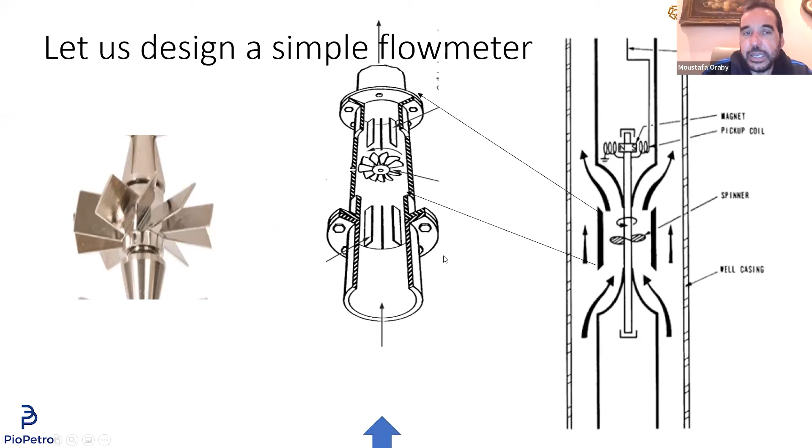But the idea is to make the fluid rotate the spinner and let the spinner rotate inside a magnet. The more the spinner rotates, the higher the induced current, the higher the velocity. The lower the velocity, the lower the spinning, the lower the current - that's how we translate velocity into current, and we measure the velocity this way. So the fluid comes in, this rotates, and changes into electromagnetic forces.

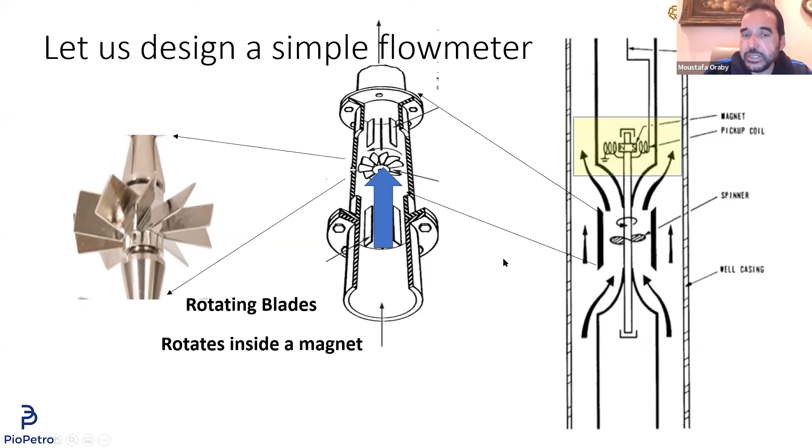This is our rotating blades. The rotating blades rotate inside the magnet. Here is the magnet that the blades rotate inside, and the rotation inside the magnet produces a voltage, electromagnetic force, or current - whatever you call it. All of these are related.

And then you can actually read this as velocity. The higher the voltage, the higher the fluid speed; the lower the voltage, the lower the fluid speed. That's how the flow meter actually works.

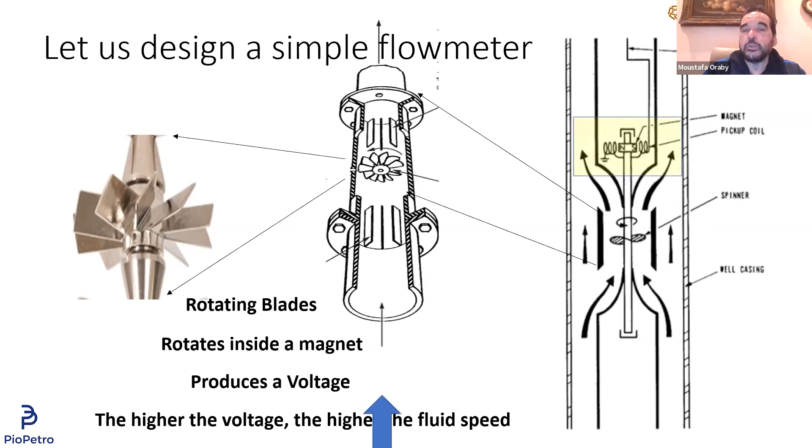Let's go back to the India example. I've exceeded the hour now, I guess, but that's okay - just give me a few minutes. Here is the Indian example.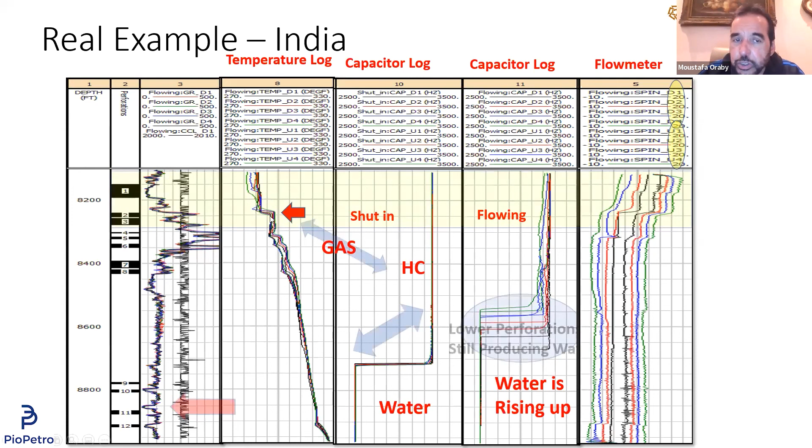Now, when the gases come in, look at when the gas came in here - you can see the sudden change that happened. Gas came in with a very high velocity, and you can see the velocity changing, the flow rate changing. The flow rate clearly came up where the gas expands and where the gas is coming in. So this zone shows the 4 up and 4 down passes, and the big transition in velocity really coincides well with where the temperature showed a big flow of gas, which affected the flow rate and increased the velocity in this case.

You know the velocity, you know the cross-sectional area, so you can calculate the flow rate. Flow rate calculation isn't as simple as I'm saying, but let's leave it that way for this level of the course - so let's just go with Q equals V times A.

There are some things you consider for the flow regime - is it really a laminar flow, or is it a turbulent flow? I don't want to waste your time on this, it's a bit more advanced.

Probably if there is a need for this, we can talk about it in another webinar. But yes, you actually look at the velocity distribution, the regime you have there - laminar flow or turbulent flow, and those are two different things you need to take care of. But anyways, Q equals V times A, and from this you can calculate the flow rate.

Did you do that? Yes, here we calculated the flow rate. The flow rate here is very, very low, and it becomes much different in this part. The higher the flow rate, the highest flow rate actually came at this point, and you can see this is the flow rate of that.

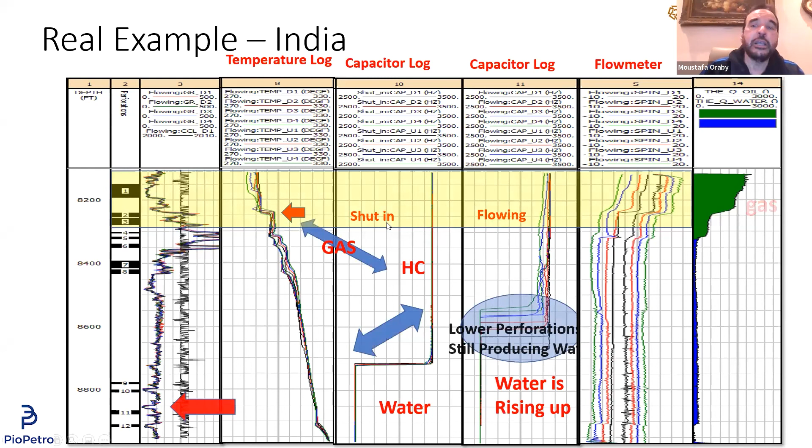So this is the gas flow rate as we saw, confirmed by the temperature log. In this well, we ran the temperature log, the capacitance flow meter, and we came up with a very interesting understanding of where the water is coming from, where the gas is coming from, and at what flow rate this wellbore is produced.

Thank you very much for listening to this webinar. This is the end of part 1. Until we meet again, guys, in part 2, I will be very happy to answer some of the questions if there are any.